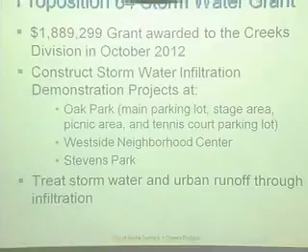In October 2012, the Creeks Division was awarded a grant from the Proposition 84 Stormwater Grant Program. The grant amount was $1.889 million, to construct stormwater infiltration demonstration projects. The sites are Oak Park, which has 3 sub-sites: the main parking lot and stage area, the main picnic area, and the tennis court parking lot. We are also going to construct these projects at the Westside Neighborhood Center parking lot and the Stevens Park parking lot. As I said, we received the grant to treat storm water and urban runoff through infiltration.

So just a little about the design of these projects. First of all, the Creeks Division collaborated with the Engineering Division to design and construct these projects. The collaboration was very successful in the Mackenzie Park project, and it continued into these new projects. The success of the Mackenzie Park project, and these new projects, has really given the city great expertise in designing stormwater infiltration projects.

For the design of these projects at Oak Park, Stevens, and Westside Neighborhood Center, about 100,000 square feet of asphalt is going to be removed. In place of that, 85,000 square feet will be permeable pavers. The remaining 15,000 square feet will be covered with native vegetation, native soil, and mulch in some cases.

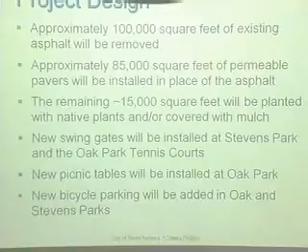Swing gates will be installed at Stevens Park. Stevens Park has a chain across it right now. We're going to put a swing gate in there, and the Oak Park tennis court lot will have a swing gate at the entrance. New picnic tables will be installed at the Oak Park picnic area, and bike parking will be added at the Oak Park main picnic area and Stevens Park.

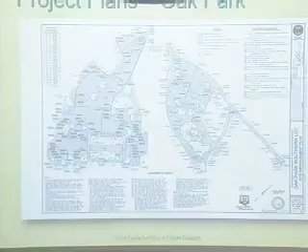So I'm going to go through the plans really quickly, just some basic design elements of all of these sites. On all these sites, the gray area is where there is existing pavement. These are the 3 Oak Park sites. Just to orient you, this is the horseshoe pit, this is the stage, this is Mission Creek running through, and on the other side of the creek is the picnic area. Picnic tables right here, playground, bathrooms.

So the gray area, as I said, will be removed. All the asphalt will be removed and replaced with permeable pavers in this area, except in a couple spots, such as this one, where native plants and landscaping will be placed. And then on this side, the picnic area, pretty straightforward.

The tennis court parking lot up off Tallant Road. This is Tallant Road right here. This is the entrance. The asphalt will be removed. This area right here is where the permeable pavers will be placed. This area over here will be left unpaved, and native plants will be put here and some mulch area over here.

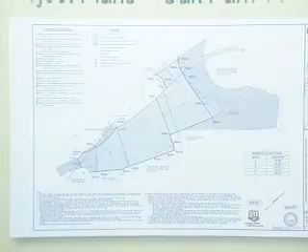The Westside Neighborhood Center. This is a portion of the Westside Neighborhood Center parking lot. The Westside Neighborhood Center building is right here. Mission Creek runs right here, and this is in between. This is pretty basic. All of it will be replaced with permeable pavers. These are a couple tree islands right here.

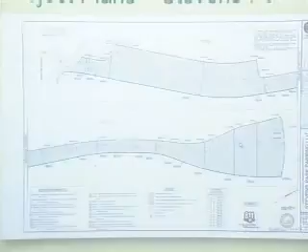This is the Stevens Park plans. This is Canon Drive right here. As you drive into Stevens Park, this is a steep little section of driveway right here where the asphalt will be removed and replaced with concrete. And the water from that concrete will be directed to a swale that flows to San Roque Creek.

The rest of the parking lot that extends down as you drive down will all be permeable pavers. Down here is a continuation of up here, all the way to the playground and the field. Bike parking goes up here.

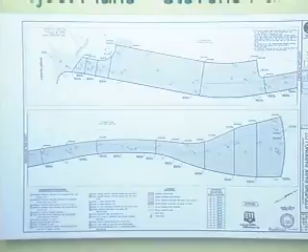So, to give you an idea of the timeline for this, the City Council approved the construction contract with G. Sosa Construction Incorporated on March 19th. The plan is to construct between May 1st and October 31st, and that's going to be done in 2 phases. The Stevens Park, Oak Park Tennis Court, and the Westside Neighborhood Center will be done between May 1st and July 31st. And then the Oak Park main lot, stage, and picnic area will be done from August 1st to October 31st.

Let's see. Lost a slide. Well, I happen to bring a paper copy, so I do have a backup in case this doesn't last.

I'm sorry, August 1st to October 31st for the main parking lot, for the Oak Park sections. Okay, so for the budget, the estimated cost to construct the upcoming stormwater infiltration projects is going to be $2,361,624. Let me just jump right to those.

There we go. Okay, so as I said before, the Creeks Division received a $1.889 million grant from the State Water Resources Control Board through the Prop 84 Stormwater Grant Program, and the balance, the difference between the two, will come from the Creeks Division Capital Fund. And with that, that concludes the presentation, and I'd be happy to answer any questions.

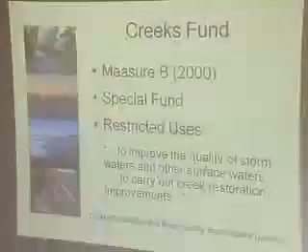As you know, most of the funding for the Creeks Division comes from the voter-approved Measure B, which was a 2% increase in the transient occupancy tax or hotel bed tax. It's placed into a special fund that is restricted to pay for stormwater and surface water quality improvement and creek restoration projects. The Creeks Division receives no funding from the general fund. And the budget we're proposing is consistent with Measure B as well as the Creeks program funding guidelines, which were reaffirmed by this committee back in January of 2010.

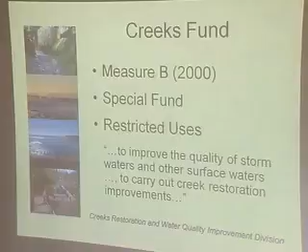I'm going to move on to the numbers, and I'll start with our revenue. Our fiscal year 2014 TOT revenue projections, which come from the city's finance department, are up by $392,000, which is almost a 12% increase from the adopted fiscal year 13 budget. The finance department further forecasts a 3.5% increase in FY15 from the FY14 numbers.

And as with the past few years' budget, and as we discussed at our capital improvement program meeting back in October and during our budget subcommittee meetings in February and March, we're proposing to transfer funds from our Creeks Fund reserve to balance this year's budget. And that's because, as you can see, our proposed revenues are not going to match up with our proposed expenditures, and that's largely because we've increased our funding of our capital program over the last few years.

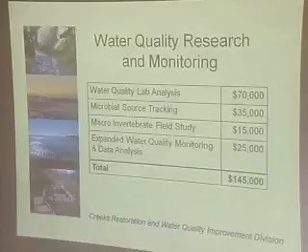Second, the stormwater treatment retrofit projects. You just received a presentation on the projects we're going forward with this summer. We plan to fund that program. This is largely money that will be used for grant matching funds going into the future as we look at different projects. We are looking to expand beyond parking lots now. We think we've kind of figured that out.

We've tested a lot of different locations with different soil types, different slopes, and things like that. We'd like to try to look at some alternate or additional types of hardscape that we can use permeable surfaces on, such as alleyways or parking strips along the sides of roadways.

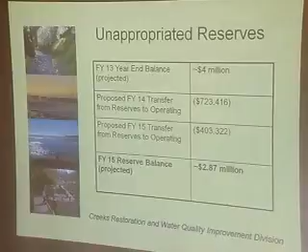So, this year we are using some of the reserve funds, but we project that we're going to end FY13 with $4 million in reserve, and then over the next 2 years we're going to be using about $1.1 million. So we expect to end FY15 with $2.9 million. Now, that number can change if something unexpected comes up. It could go down, but it can also go up through program efficiencies or grant funding, something like that. But that's our forecast right now.

I want to talk a little bit about grants for the current year and going into next year. FY13 was another very, very successful grant year for the Creeks Division. We received over $3 million in grants so far, which makes this the second time in the past 4 years that our grant revenues have exceeded our total Measure B revenues, and that's pretty incredible. Basically, 100% return on the Measure B funds.

As always, we'll continue to actively search for all grant opportunities for public and private funds so that we can provide the greatest possible benefits to our community. We do have one application pending right now for our Lower Mission Creek Restoration Project for $500,000.